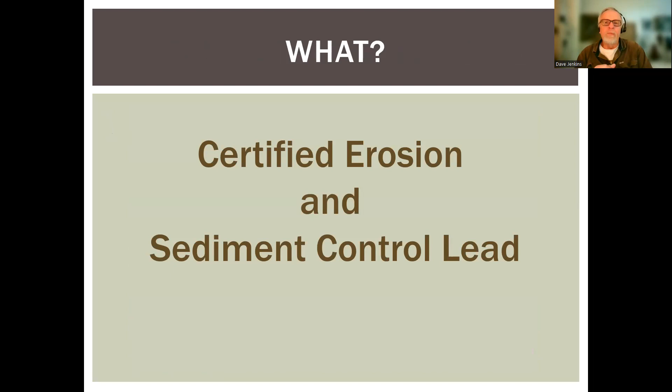So, what your CESCL can do for you, which I have since renamed: what do I want a CESCL to do for me? Since I've worked with CESCLs for a long time, I've developed some opinions on what I expect. So I'm assuming that all of you are either CESCLs, are interested in being a CESCL, or are not a CESCL and want to know more about what they do. Maybe you're going to hire a third-party CESCL for a project. So that's what we're going to talk about.

The CESCL program is recognized in Washington, Alaska, Oregon, and British Columbia. Washington and Oregon are interchangeable. I don't know if Alaska accepts or if they only allow their own certification. Same for British Columbia. The CESCL program was developed to improve and increase compliance with lots of regulations, local, state, province, federal water quality requirements and such.

A little bit of history of the CESCL program. It was started in the mid-90s. The IECA started voluntary classes for WSDOT for 1 year, 95 to 96. I was hired in early 96 to then develop a program for WSDOT only. We started requiring training of at least a contractor employee for all contractors that worked for WSDOT. In 2001, WSDOT contracted with AGC of Washington to train non-WSDOT contractors. WSDOT was getting overwhelmed with their program.

And in 2002 and 3, AGC Washington updated the program to cover non-WSDOT work. And then in 2005, Washington State Department of Ecology included a new BMP for CESCL in their stormwater management manual. AGC Washington updated their training to meet those requirements. At that point, they were the only trainers. And since that time, probably starting in 2006, there must be almost 20 different training organizations doing this.

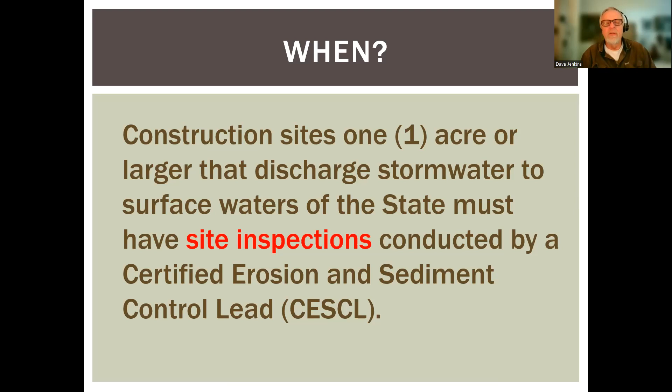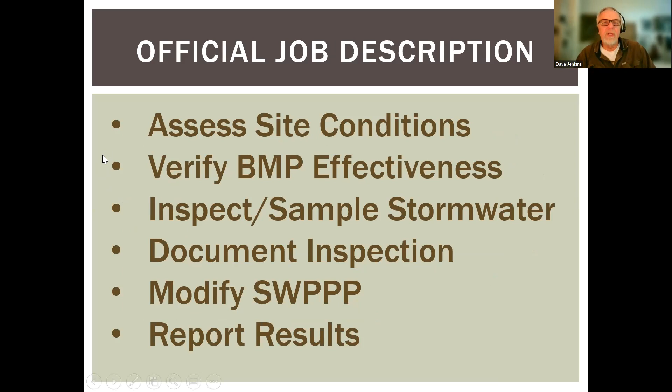So when is a CESCL required, at least in Washington? Construction sites 1 acre or larger that discharge stormwater to surface waters of the state must have site inspections conducted by a CESCL. The official job description would be something like this: the CESCL would assess site conditions, verify BMP effectiveness, inspect and sample, document, modify the SWPPP, and report results to Department of Ecology or whatever your state's regulatory agency is.

But the real job description, according to me, is to keep the owner in compliance, keep inspectors happy, prevent citizen complaints, but mainly assess discharge risk. Every time a CESCL goes on site, they should put on their risk assessment hat and, doesn't matter if it's sunny or raining at the time, look for potential problems so that they can be corrected before they become actual problems.

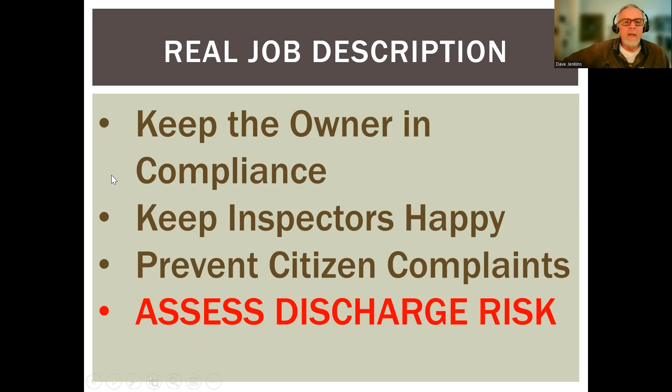So that's what I'm going to talk about. I'm not going to talk about how to write the inspection reports, how to submit them, any of that sort of stuff. I'm just going to present a lot of examples and talk about risk assessment for each one. Some with really no risk, some with very low risk, some very high risk. And I just want to chat about each one individually.

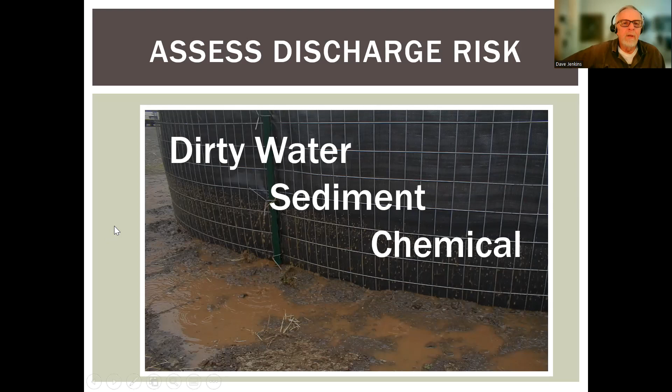I'm going to start out with a project near my house, actually, across Puget Sound from Seattle. This is an 18-acre subdivision that started several years ago. They're pretty well built out now. I think they're still building some houses, but it's mostly built out. So I took a series of pictures over probably a year because I drive by this all the time. So this is the first of the series.

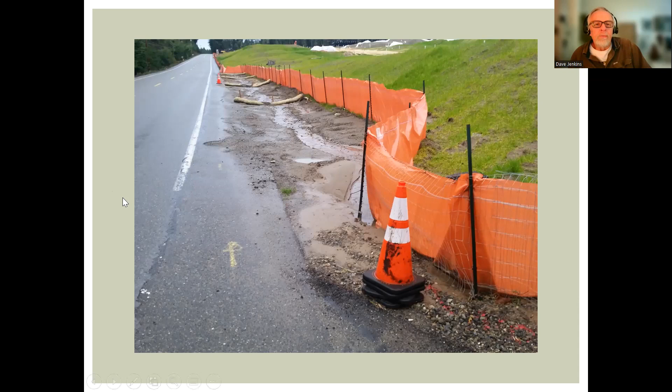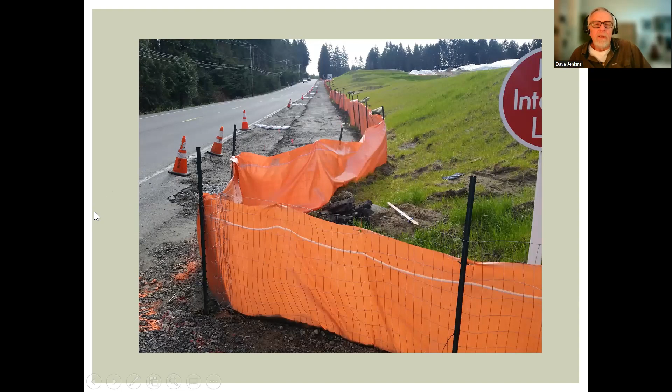So here's later, a few months later, they're starting to prepare to put in sidewalks, curbs, gutters, all that sort of stuff. Still having problems. So they moved the silt fence all the way over to the right and installed sandbag check dams along the roadway. So clearly there was risk of runoff on this, and this is how they're dealing with it. And I'll go into what probably should have been done as a first order of business on this.

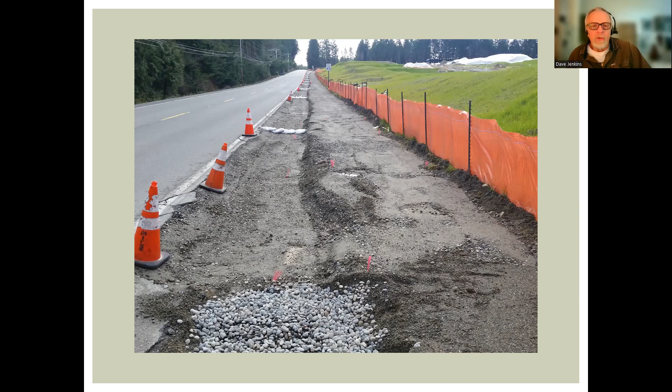So another picture of that. The gravel is a stormwater, a catch basin under there. So you can see the steel plate here in the corner where the catch basin is. So the silt fence is moved all the way out of the way. Looks like it's poorly installed. You could question whether you even need a silt fence.

And by the way, I should have mentioned, when looking at these pictures, I'm looking at them as a CESCL that maybe goes out onto a site once a week. Maybe that's what the contract is with the owner. I just have to go out once a week or after certain rain events. So cold call, basically, you go out when you can and you document what you see. So these are individual cold calls I've made, basically.

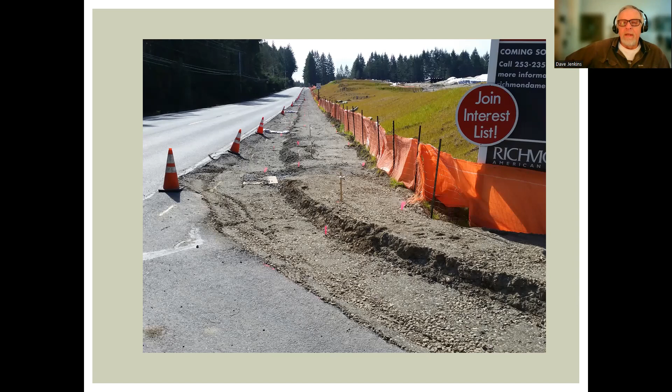And now I'm seeing, well, what's the point of having the silt fence? And this is one of the things a CESCL should do, is let the contractor, let the owner know, here's what I think. The risk of sediment running off the site into the street is about zero at this point, and actually has been for a few slides there. So another picture, same thing.

Okay, now we've got the curbs in. Silt fence is still in, grass has grown 2 feet tall and dried out. Looks like it's summer, so the risk is lower than it was. The risk of rain is pretty low at this point.

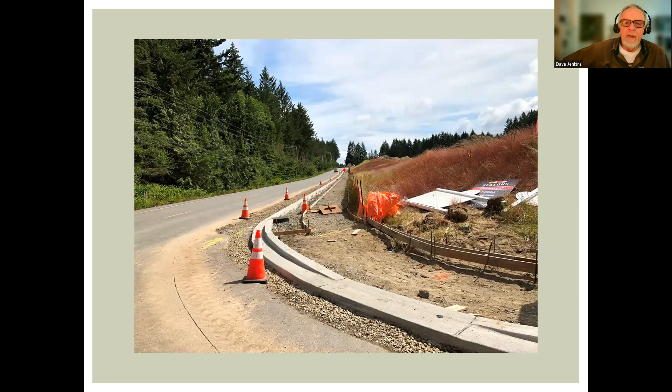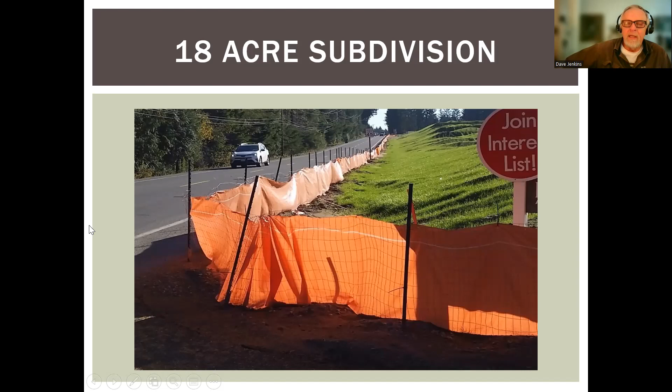So let's go back to what should have been done. So this is your first visit to the site, and you notice the grass on the right, you notice the asphalt on the left. So the first thing you think is they need to do something with the road runoff and keep it out of our project. There are several ways to do that. But you could talk to the contractor and say, look, here's what the issue is. You're going to be managing all this water for months if you don't do something.

Can you at least get your curbs in as soon as possible and at least put in a first lift of asphalt between the curb and the existing street? Now you say to yourself, well, you've got to put the storm in. Well, you can put pipes in. You can put the catch basins in and cover them up. You don't have to run the curb all the way. You could run breaks and put sandbags in place in the meantime, but you've got to get that street runoff away from your project.

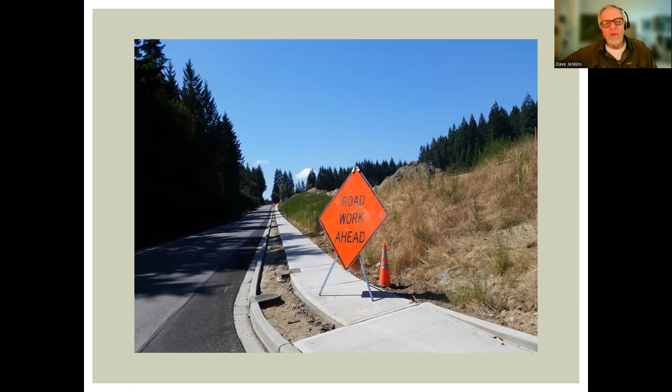So this to me is an extremely low risk. And if this is a large project, which it happens to be, this is not something that I would continue to look at. I would move on to other areas of the project from this point on to look at things that are higher risk.

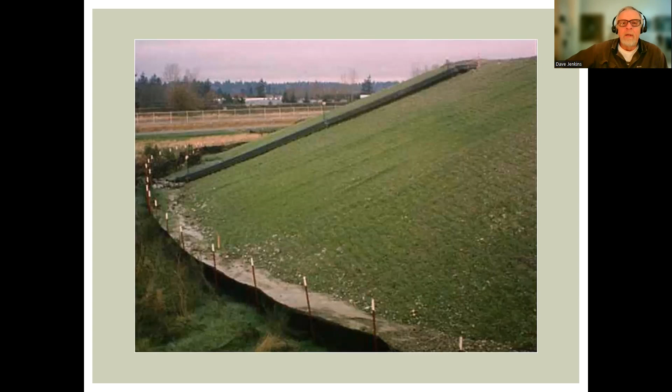Okay, another project, big fill job. It's about 90 feet of fill when they get done with us. And it looks like it's summertime, which is good. But I'm looking at this thinking, why are they not doing anything with the slope? I would recommend that as they build slope, maybe every 20 to 30 feet of elevation of slope, that they track walk it and hydroseed it if they can, but at least track walk it.

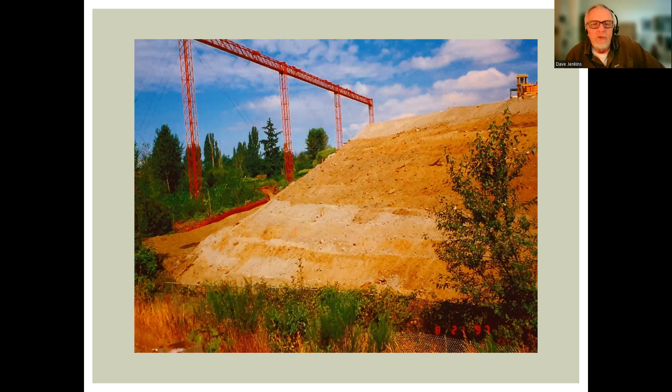There is silt fence. You can't really see it on the base of the slope, but there is silt fence down there. Unfortunately, on the left side behind the orange construction fence is wetland. So any failures on this is problematic. So yeah, this would definitely be a high risk potential on this project. If you get a big summer storm, you could have problems. So this is one that I would want to work with the contractor as much as possible to get them to finish up the slopes.

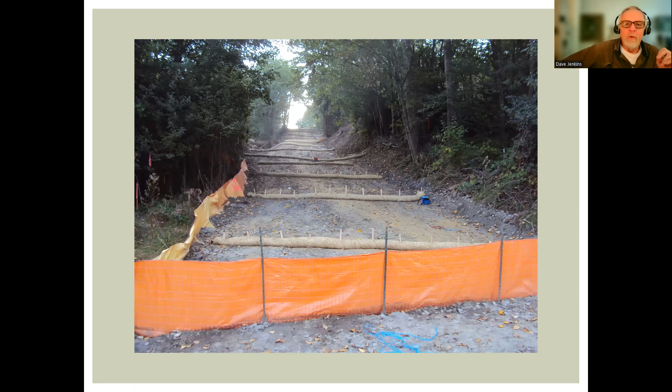Okay, jump to another site. This was a storm connection. And I don't know why they put the silt fence on the left going up the hill. It's not typically done, but silt fence looks like it's installed well. The straw wattles set maybe every 15 feet on contour, staked in well. So I would say this is a pretty low risk. I would watch it, but it's a pretty low risk project at this point.

It used to have a high potential risk because of the wetland and there's a creek to the right, but this contractor's done a really good job. Silt fence at the base, which is really where silt fence should be installed, at the base of slopes. They've obviously track walked, they've blanketed the slopes. They've started planting, I think, native plants. The curb is in, they haven't installed the sidewalk yet, but curb and gutter is in.

So this is a low risk. Would still have to look at it because it is rainy season, looks like, on this. So this would definitely be keep an eye on it, but it's pretty low risk at this point.

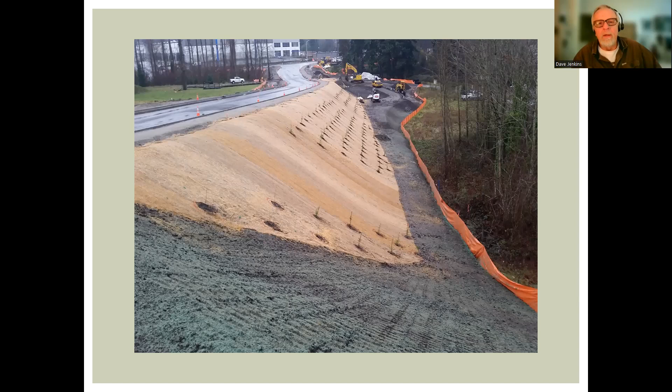Same here. At some point, it had a high potential: creek relocation restoration work. But at this phase of construction, got blankets. We've got a splash pad for the storm discharge, silt fence at the top of the slope to keep staging area runoff diverted away from the creek. Looks like there's been hydroseeding up to the top middle right, which is growing in.

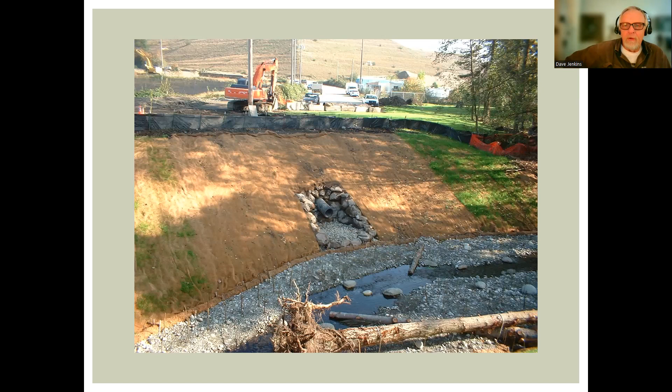So I'd say this is in good shape. And since the creek is flowing, obviously the work is essentially done. They've finished the creek realignment and are letting water through.

So just looking at this one picture, this has definitely potential. The silt fence going up the slope, probably not necessary, but the silt fence at the base, typically it would be down lower, but in this case, because of what they're doing, they installed it here, and it's actually not quite on contour. They ran it so water would drain down to the end of it into the ditch line.

The reason for this is actually on the very right, you can see some plastic. That's a temporary plastic lined stormwater pond with a pump on floats. And then there's a pipe going up the top of the slope into perforated pipe to disperse any turbid water. So just on the surface this looks like it could be a high risk, but with the way that the project was designed and is being operated, the actual risk of dirty discharge, unless the pump fails, of course, is about zero.

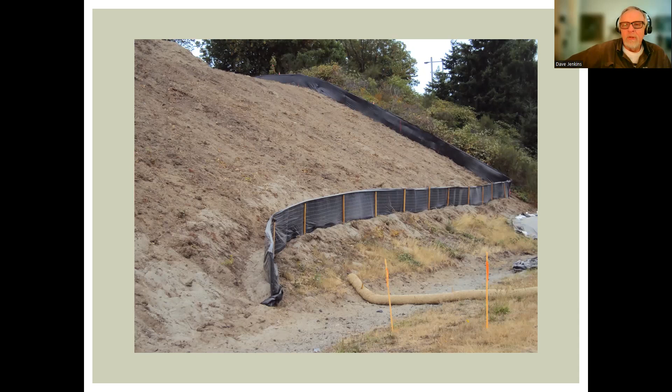This one, it's a shallow slope. There's not much area involved. There's a little bit of asphalt for runoff, and you can see some rills have formed from road runoff in the center left. The silt fence is probably overkill for this site, and it looks like it's probably spring or summertime. So the risk on this is low as long as nothing can drain down out through the gate,

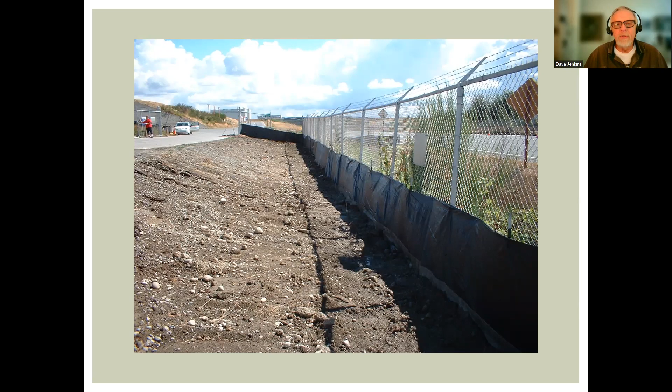which it doesn't look like it can. So everything would be contained on this. I do talk to contractors about, look, if you've got this graded, just track walk it and get it covered, just get it done. But yeah, this is pretty low risk.

This is a little bit baffling. So let me just back up again. Again, we're looking at these as, this is the first time we've gone out on each of these sites as a CESCL, and we're determining risk of discharge of dirty water, sediment, or construction type chemicals.

So if the silt fence is the project boundary, which it typically is, what's the risk of discharges from this site? It's grass to the left. The work area is actually set down a couple of feet from the existing grade. So there is really no possibility for discharge here.

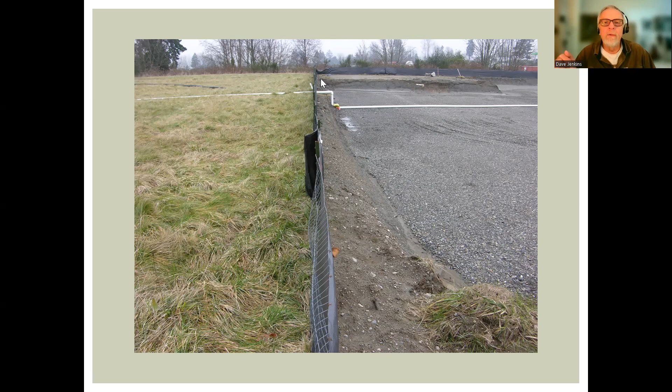Okay, we're doing all these sites in one day, which is how I used to do inspections. Working at the Port of Seattle, I always had lots of projects to look over. A couple of years we had over $1 billion worth of construction going at any given time. So a lot of the inspections that I would do were drive-by. So it was just a very quick windshield assessment. Do I need to spend time on this or not? So this is one of those.

It is wintertime. This is probably January, February. It was a project to clear out blackberries and other invasive species and then replant native plants. So it's a pretty flat site. There's extremely low risk of anything running off this, especially considering as soon as they cleared everything off, they placed mulch, planted the native plants, and left that's actually burlap silt fence with straw wattle on the flap, which was then left in place to rot away rather than removed. So the equipment didn't have to go back in and remove silt fence.

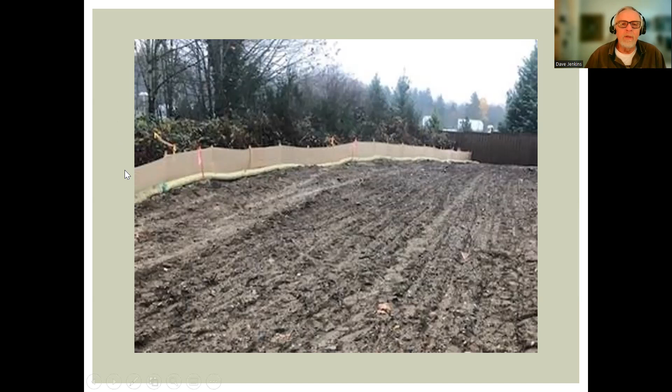So if I have a lot of projects going on, this is one I would just kind of check off. I might call the contractor once in a while and ask them what they're doing, but probably no need to spend a lot of time on this one.

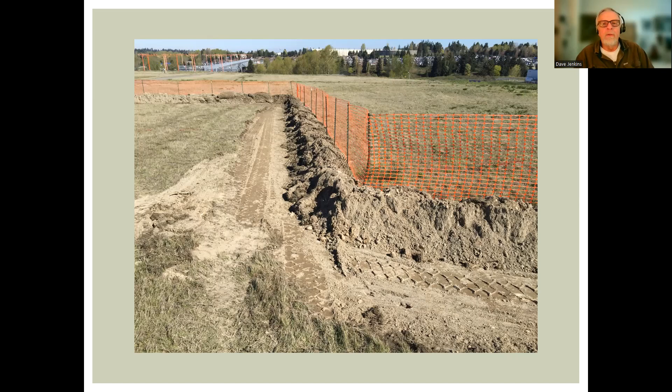This one looks like it could be high risk. I would get out and walk this one and figure out what's going on. But I do know what's going on with this one, so I'll tell you. It's a taxiway relocation. It's a pretty small area. Airfield is really flat with lots of runoff, but there's also lots of existing grass. So this type of work area, it's pretty easy to isolate.

And you can kind of tell up near the top center, there's a flex pipe or flex hose, and that's connected to a 6-inch pump on a float. So water that's to the right, which is upstream of the project and clean, is pumped around the project. And then the site water, the dirty water that's really caused by rain and some runoff from taxiways, is contained within a compost berm, which will be spread out later and hydroseeded when the work's done. So this is one to watch, but as long as the systems are functional, the pump is bypassing and things like that, then this is low to medium risk, I would say.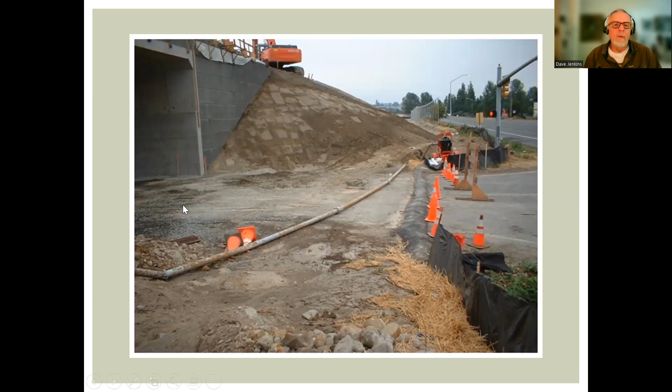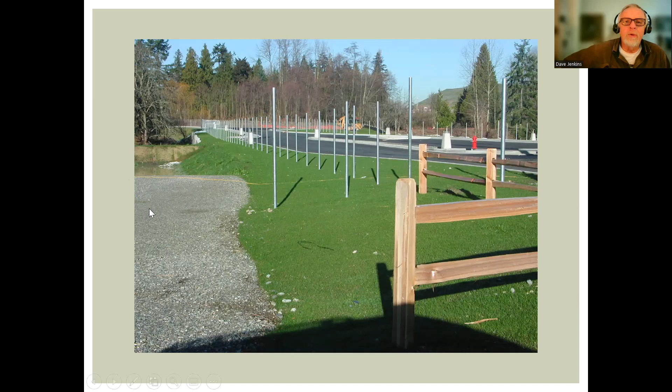But overall, at this point in the project, it's a very low risk. In fact, I think everything now is draining into their permanent stormwater pond. So we've got gravel, grass, asphalt. I'm not that familiar with the stormwater permit because the airport had their own, but for the airport, I would call this a stable site and I wouldn't inspect it anymore. Don't know how that works under the regs under Ecology.

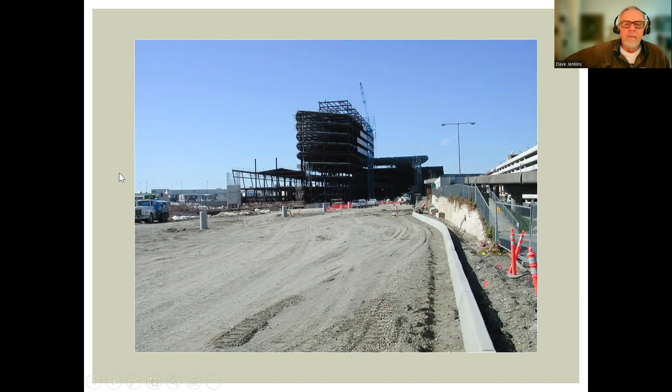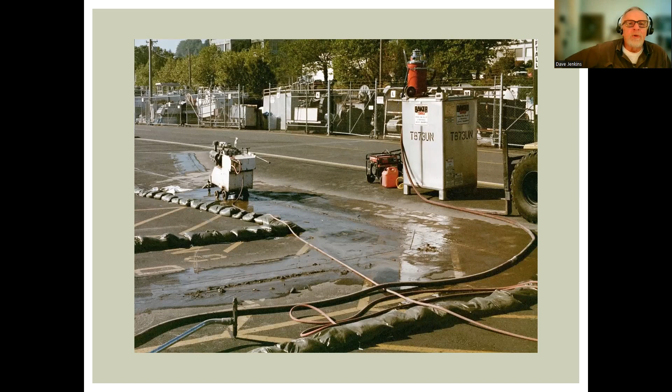And they are vacuuming, that's what the big tank setup is on the right. As long as this is kept clean as they go, and as long as the sandbags are secure, and there's no possibility for water to drain to a catch basin, it's pretty quick work. They'll pull up the asphalt here and then they'll have a low spot so that water could drain and infiltrate. So probably medium risk for a while and then low risk, although there is a gas can sitting there. So that has some potential if that got tipped over.

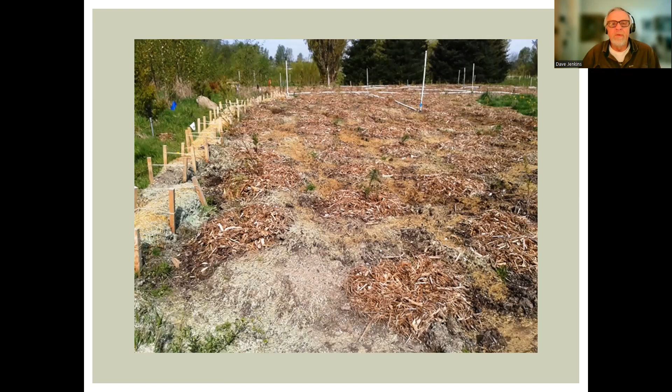Another native planting site. It's flat, it's planted, it's mulched. It's got coconut fiber logs around the perimeter. So again, at the port, under the Port of Seattle's permit structure, I would sign this off as a stable site and I wouldn't inspect it anymore. So this is really no risk at this point.

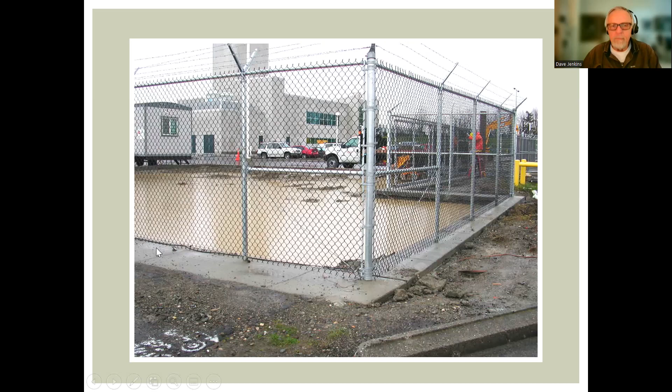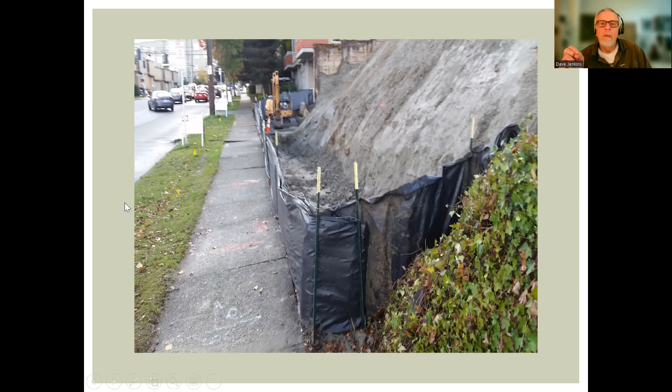Small site, poorly managed. And this does drain down eventually, well, not too far, actually, about a block away into Puget Sound. So with enough rain, this is going to cause a plume out in the Puget Sound. So this actually, for being a small site, is a really risky site. And I would want to talk to the contractor quite a bit.

Although I should point out, this is less than an acre, so it's not going to be covered under at least the Washington State Construction General Permit. But you also have to comply with city regs and county regs and that sort of stuff. So you still have to do erosion controls.

So these kind of sites are challenging because you need access. You'd think maybe we can put the silt fence all the way around this dirt area. But then how do you access it? So definitely installing the silt fence correctly, maybe flipping it up a little bit so there's kind of a hook there to catch most of the site water. Does need a construction entrance, that sort of stuff.

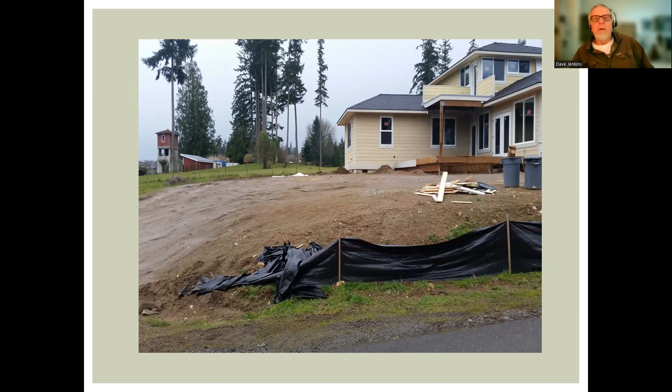And another thing on these types of projects, the roof is put on, the fascias are put on, the gutters aren't necessarily put on right away. And it looks like on this one, they're not. So any roof drainage is going right onto the site and creating other problems. So getting the gutters in and piping it away from the project is always helpful.

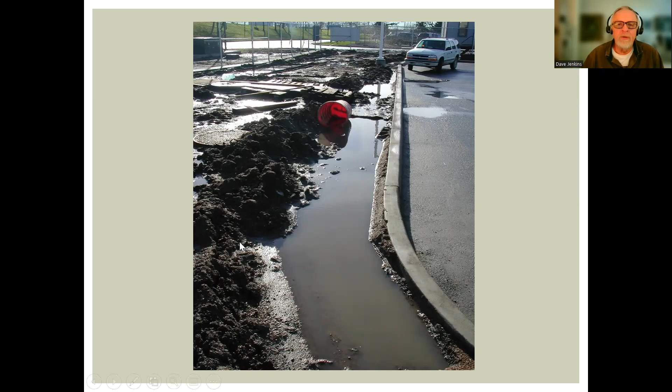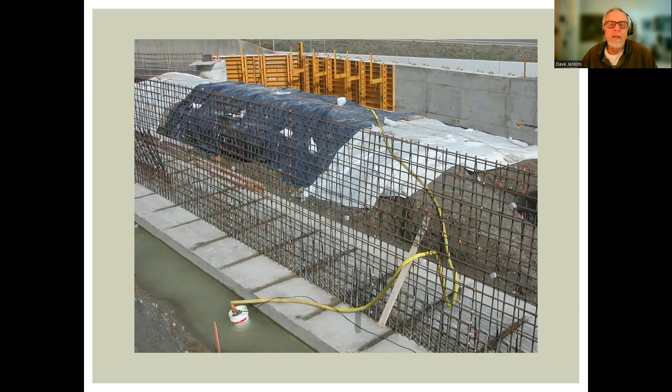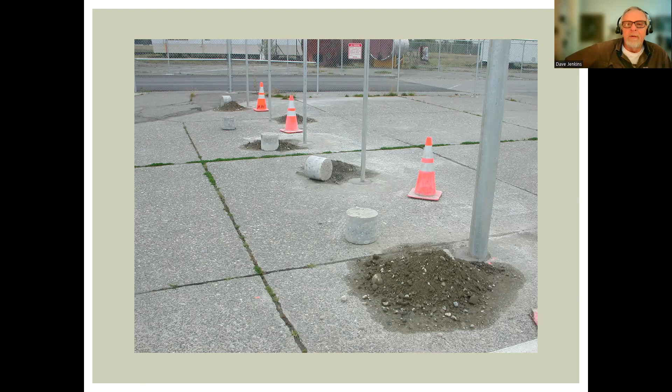So at the point of this picture, this is a high risk, and I'm going to go track somebody down and say, hey, you need to get that cleaned up and swept up and get it out of here. And think about, as you're progressing with the work, when you core the hole, put it in a wheelbarrow and get it out of here. Put it in a pile and cover it someplace else, but don't leave piles.

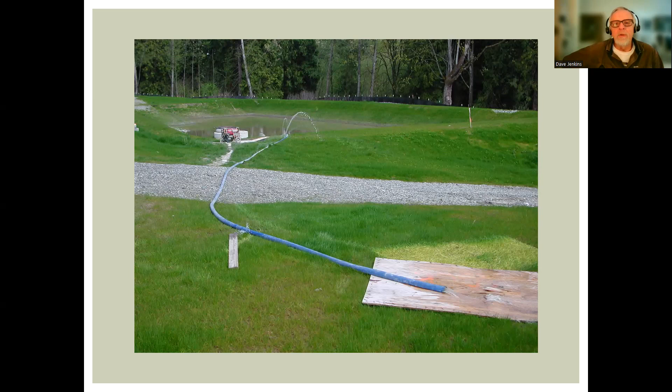But there's no possibility for scour from the pump or discharge flow. So this is a low risk, and having to go through so much grass, any turbidity that's in the water really isn't going to make it to the creek, which is about 100 feet away.

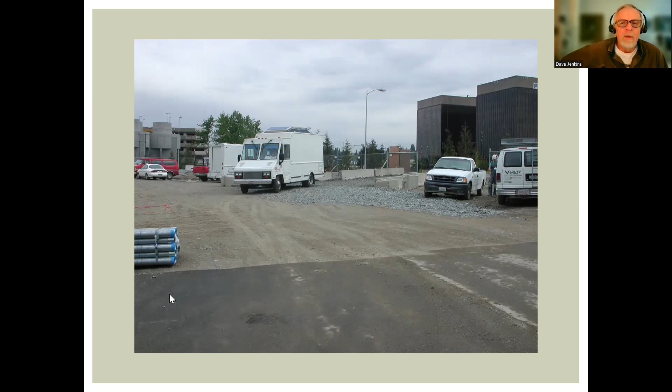So you kind of have to package this as it's going to save you money if you just do this, a couple loads of rock, and you're going to cut your sweeper time down, at $1,000 a day for a sweeper. So you just have to kind of package things sometimes, which I did also, but sometimes it was just, you need to do this. And sometimes my truck would break down in a construction entrance and work would stop until they did it. So anyway, hope that answered your question.

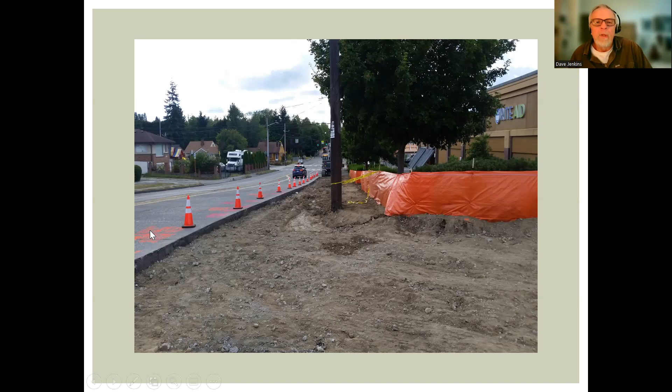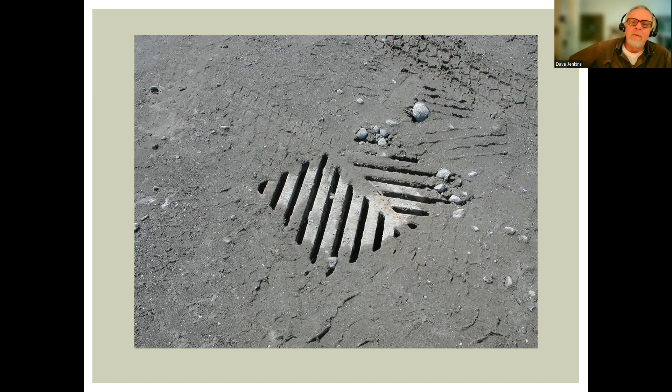So if this is a plugged system that's somewhere downstream, then there isn't a discharge issue under the permit requirements, but you are going to have to clean out the system before you do pull the plugs. So like they say, the eyes are the windows of the soul. Catch basins are windows to the wetland. They're always a very high potential for problems.

This one actually is, they're repaving. So the old grout and upper ring of the catch basin was damaged. So now it's wide open. This one, I don't remember if it's live or not, but this is kind of like when I see pumps set up, I always just tighten up when I see these kinds of things. And I ask questions. Is this a live system? And did you know that you're going to have to clean this out before you can turn it over to us? So got several of those.

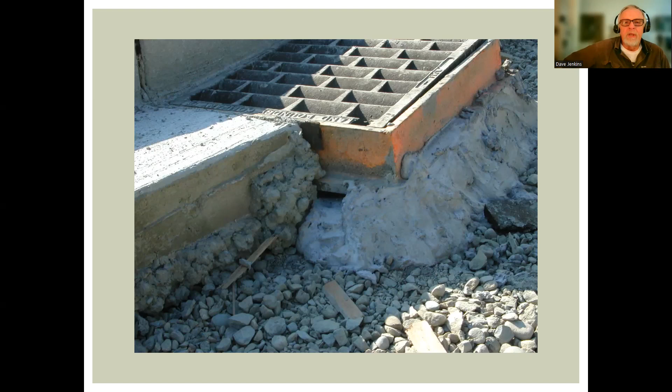This is a little weep hole that contractors will install to keep the grade from flooding. So you can see in the corner there. So I look for those kinds of things. And it also tells me it's a live system. They want the grade to drain. It's live. This is a way to do it. So this would be get that plugged and don't discharge.

On a bigger scale. So this is an addition to an existing system. It is not connected at any point yet. So at this point, it's just a low risk, keep it clean, but something to add to your checklist on this project to always check, ask questions, make sure the contractor is being diligent with these things.

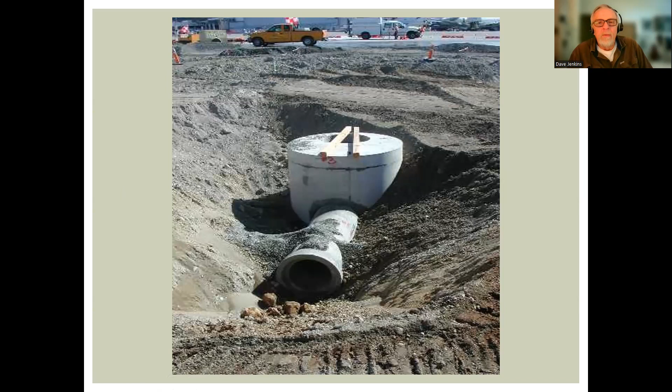Because I've seen so many of these that have been live in this kind of situation where they're at grade, but they're in a hole and they just suck dirty water in. Like this one, as a matter of fact. So this is not grouted yet. There's pick holes that aren't grouted. So water that's building up here is going right into the system.

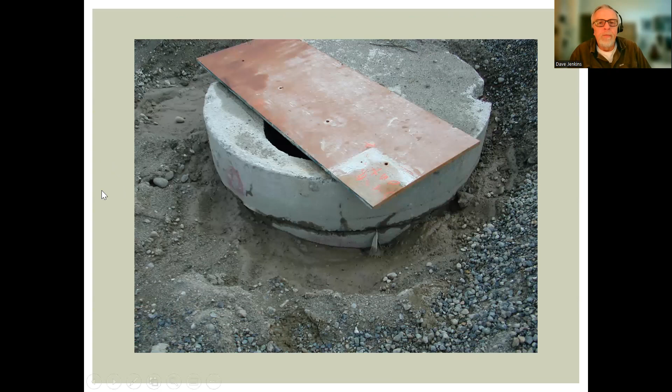Here's one that is extremely risky. And if you look at the date, and if you know the weather patterns in the Pacific Northwest, having this many acres, I think this was 80 acres, in this condition in late October, is a problem. And I did a presentation on this project a couple of years ago, which was just a total disaster. But this was the first year.

They started the summer of that year doing the grading and stuff, but didn't do any soil cover. So very risky project, surrounded by wetlands, creeks and such, and caused the contractor a lot of heartache and headache and loss of money.

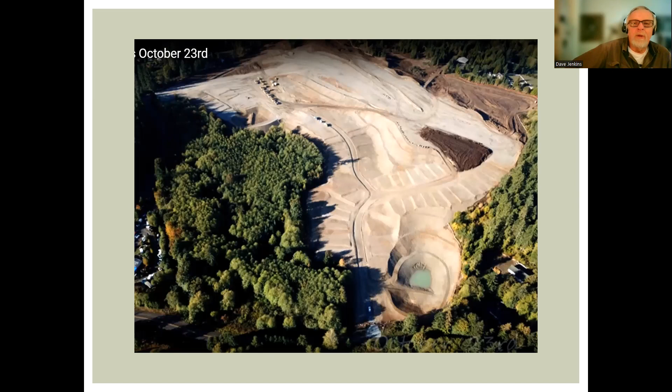So this would be a challenging one if you're a CESCL on many levels, working with the contractor, having to push them to get stuff done. And maybe they didn't want to, and then getting in trouble with Ecology, the contractor, or the owner. As a CESCL, you have some responsibility. So this is one that if I was the CESCL on this job and I wasn't getting any cooperation, which the person did not, I'd go find another job. This was a bad one.

And not to go into what they should have done, but this is something as a CESCL to really look into and talk to the contractor, because the contractor knows this. They're going to build it the way the plans show, but they know this is not going to work. So just be upfront about it and say, I don't know why this was done this way, but let's figure out how we can actually make all this work.

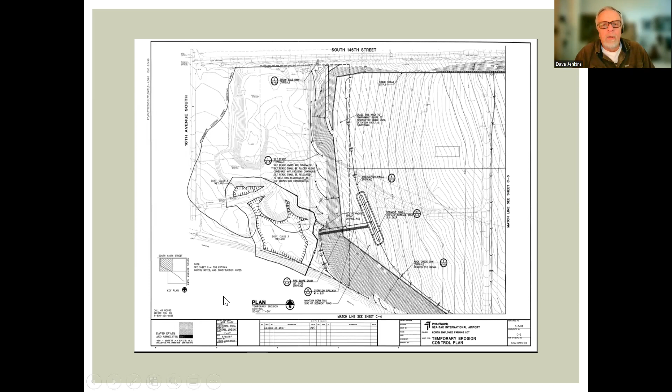Another multi-year project, inherently risky, but I won't go into all the details on it at this stage of construction, other than some track out. It was a really well-contained site. So as far as discharge from day to day, the risk was fairly low. But overall, there was always high risk that there could be problems on this just because of the nature of the work. So, it was a compact area, lots going on.

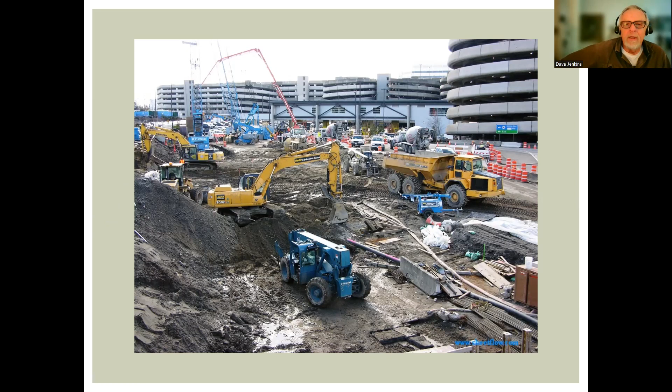And yeah, you can see they're pouring concrete. Actually, I think they're filling drilled shafts. So you can see the Malcolm is back there drilling shafts. The concrete pump is out there. The excavator's working. There's just a lot going on. And it's all wet, which tells me this is probably spring or fall work. So inherently risky, needs to be watched all the time, and looking for ways to prevent anything discharging.

I'm going to skip that one. I should have put this with the other erosion plans. So this was the final erosion plan submitted. We were too late to be able to change it. We had to get started on work.

The problem with this one is this sediment pond. So this is a temporary sediment pond, and knowing that turbidity is not reduced significantly in a sediment pond, and since we have pretty strict standards, this is not a workable water management system during construction. So we made a lot of changes. I don't remember if I put pictures in here, but this was one of those, yeah, that's not going to work. So we need to work with the contractor and figure out what to do different to make it work.

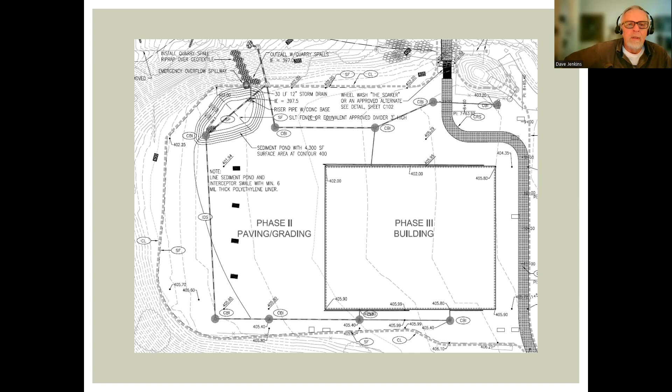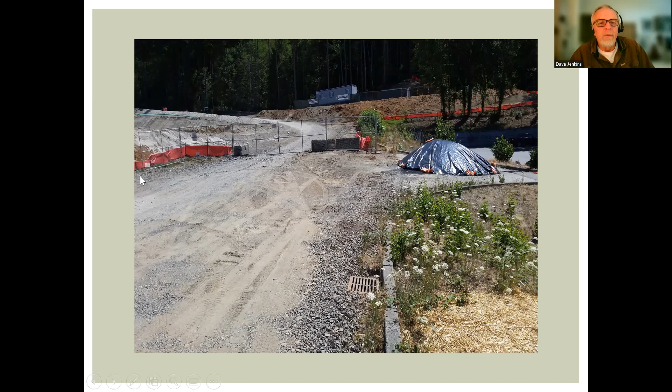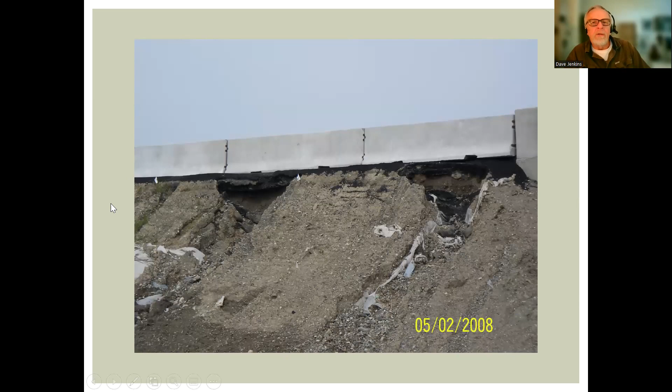So I see I'm going to go way over on this. So hope some of you are hanging in there.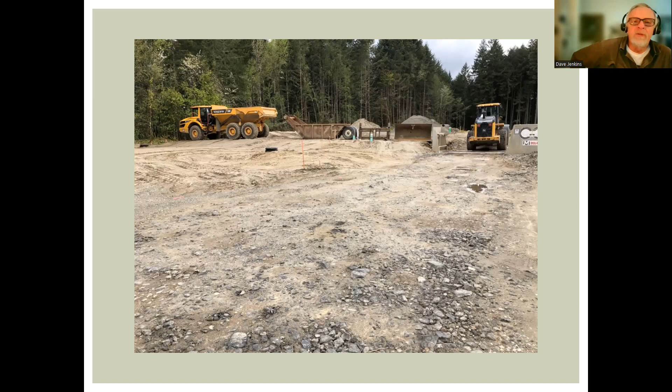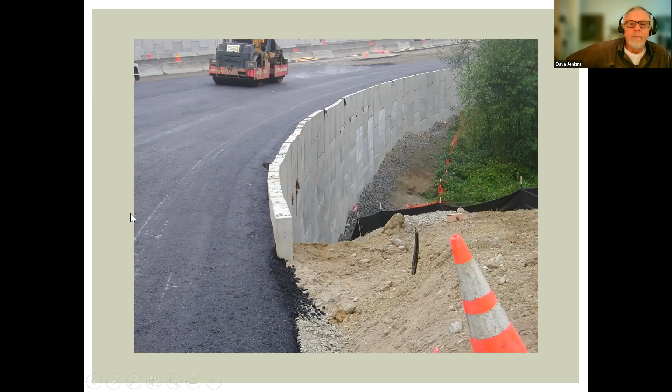Similar situation, but as it turns out, because of the concrete foundation on the right, any water that drains off the road into this area is contained. So it's really more of a constructability issue for the contractor than it is a discharge issue.

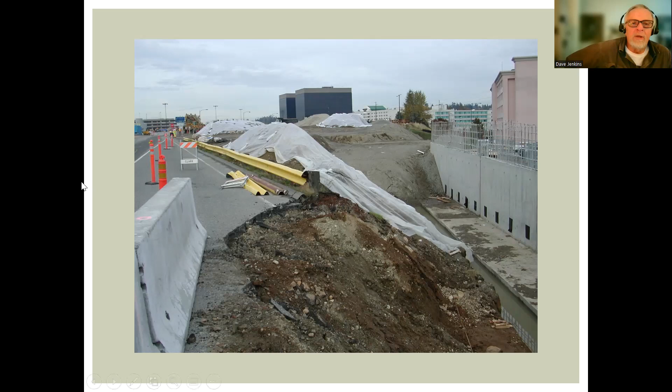I think I've covered vacuuming. Should have vacuumed as they went, but you can see the track out going out. So real high potential. And there's a creek. The airport is surrounded by creeks, if you can't tell already. So we really had to be careful with this kind of stuff.

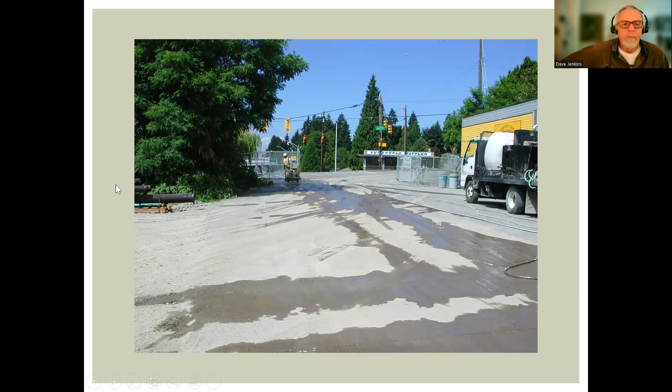Internal to the project, this is a large project. I don't remember the source of the water. It might have been a leaking water truck. So as far as the permit goes, this is not a problem. It's only a problem if vehicles are driving through it and out onto the road. I've just put this in here as, is this a problem? Yeah, it could be a big problem, but it happens not to be because of where it's located on this project. And I always like to think of things like that.

I don't want to be on a contractor about everything. I really try to think, is this a problem? Could it be a problem? What can I let go? And this would be something I keep an eye on, and I talk to the contractor about it and say, hey, watch this, keep an eye on it. But I wouldn't bug him about it really.

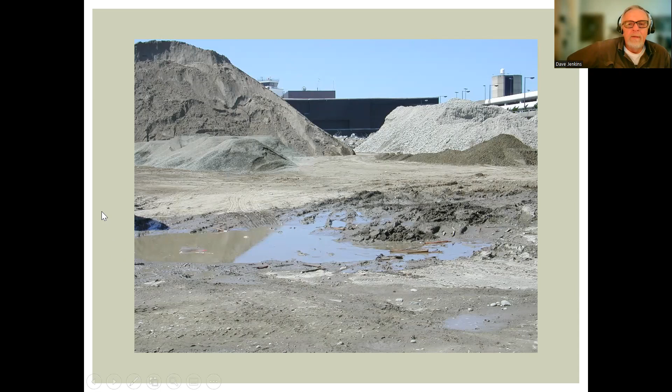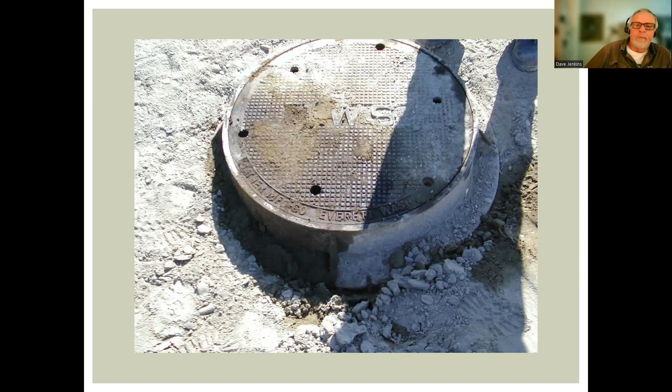So just be aware of where the project is in its overall schedule and what's coming up. If you know that landscape work is coming up next week and it's going to rain, it gives you an opportunity to point that out at the weekly meeting and to talk to the landscapers and say, we don't want anything dumped on the asphalt unless you put it on plastic and cover it.

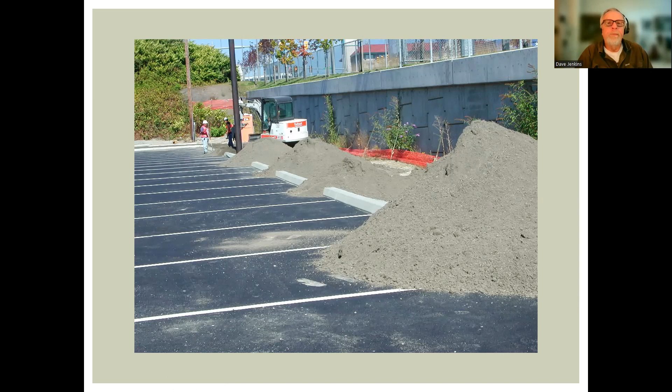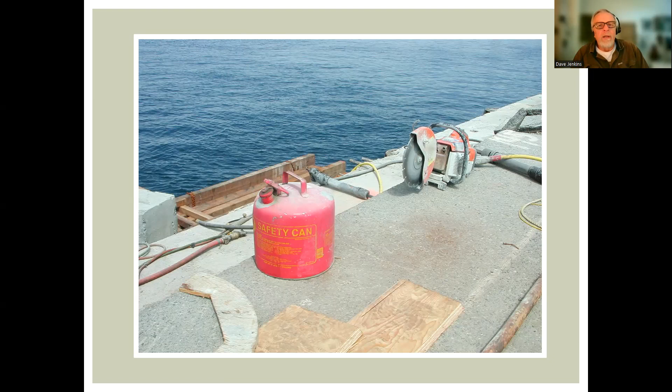Okay, I haven't talked much about chemicals. And although this is a safety can, they still can be tipped over into the water, and they can still be run over. So this is a really high potential. This is right on the water, right on the dock. These should be kept away from the edge. Taking your equipment to a fueling area would be better, and keep in secondary containment. So all things to point out to a contractor.

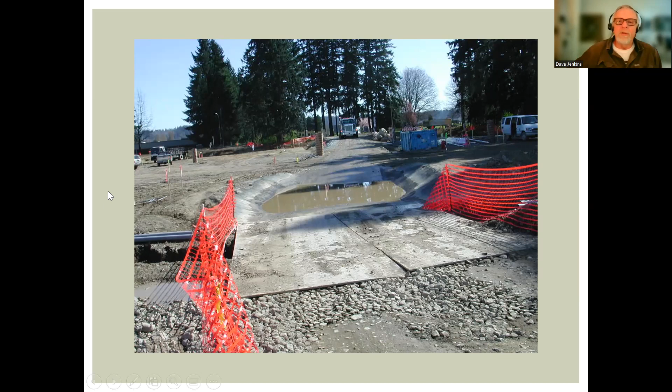Real high potential for track out on this one. Tire baths are not that great because they fill up with mud and then they get tracked out. Plus the approach is dirty. The approach into it and the exit out of it are dirty. So there's definitely track out from this one. This would be one to watch. This would be one to talk to the contractor about.